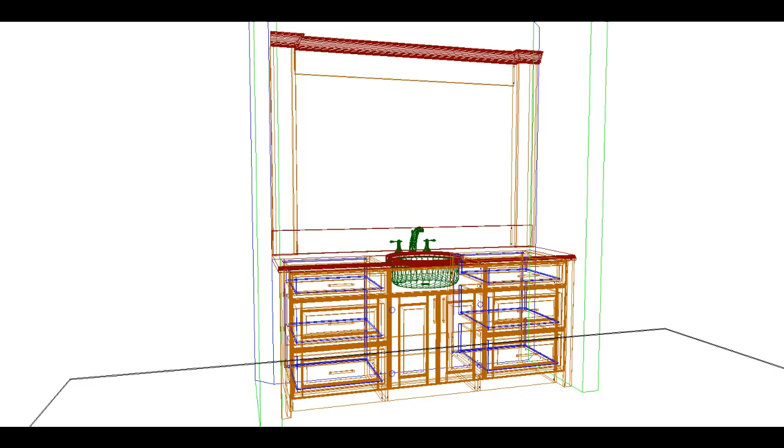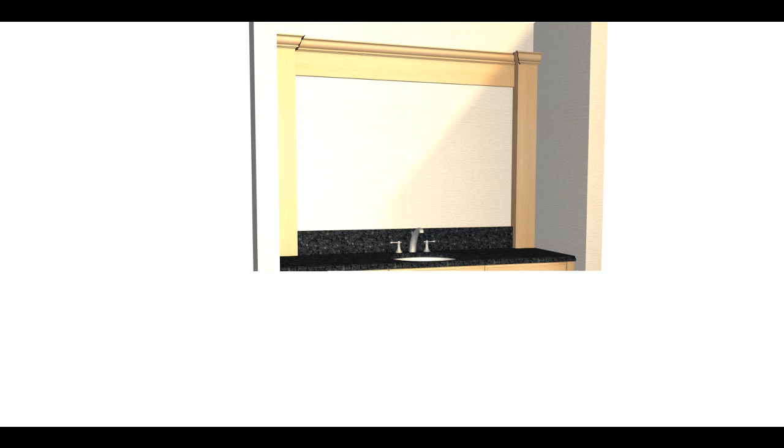I'm going to show you today how to lay out a standard vanity cabinet. Pretty easy. This is not a master vanity by any means, but just a real simple vanity cabinet that you can put into a powder bath or a guest bathroom or something like that. It's pretty simple, and really with cabinets, usually simple is a lot prettier, so let's just stick with something that's easy.

And you can kind of trick this thing out at the end with mirror frames, crown molding, toe skins, and all this other stuff. But this will just get you the basics on how to lay out your vanity cabinet. So I just did a rendering here for you. What we have is a sink cabinet in the middle, 3 drawer stacks on left and right sides, and then we've got the fillers going into the walls.

Now the fillers can be minimized because you can customize our cabinets to 1/16 inch width increments, so we can really make these things minimized. Now you do need a filler. That does pull that cabinet off the wall, and it does help functionality on that cabinet. We'll get into that here in a minute.

So mirror frames up top. I put some crown molding around the top. This is our nice mirror frame we have available in our wall cabinet section of our website. Pretty easy. So let's get started.

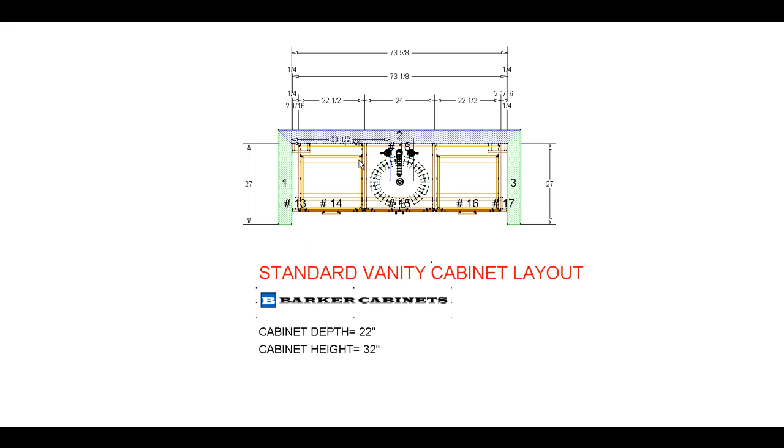Let's go into a top view. Here's a top view of our standard vanity cabinet layout. What I'm going to do is delete these, and we're going to get started from scratch, so you can kind of draw it out at home with a piece of graph paper or really whatever you want. You can just draw it on a napkin if you really want to.

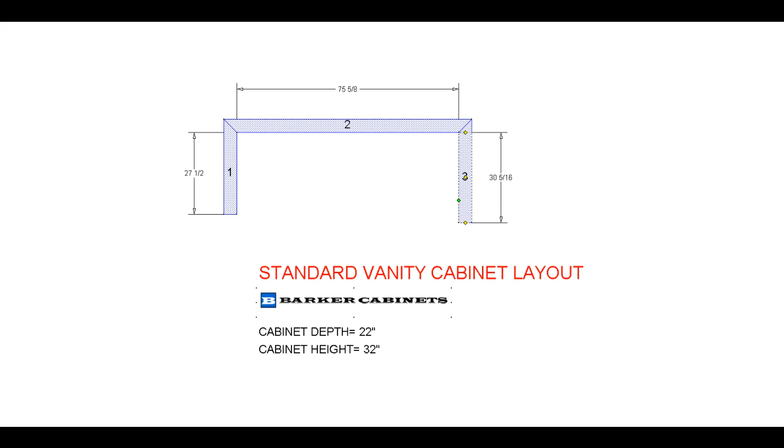So let's start off with just a regular wall. I'm going to make this wall an odd dimension, so let's just make it 75 and 5/8 or something like that. The reason I'm doing that is because I want to show you that it doesn't really matter. Your walls don't have to be a standard depth or length in any manner.

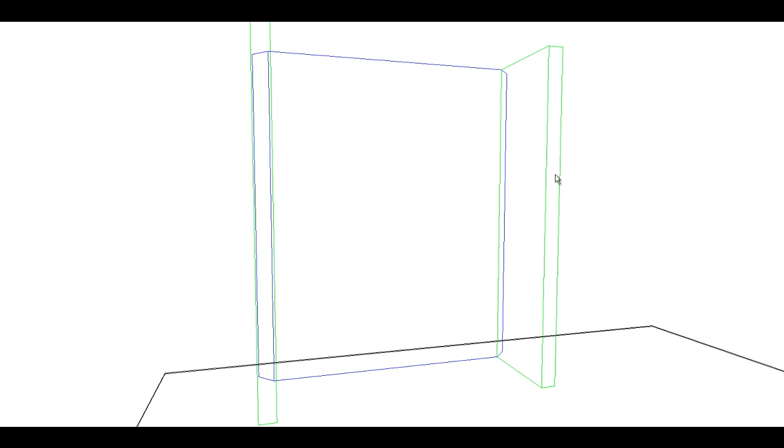So side walls here, I make them 27 inches. Normally your contractor will make these at least 24, 25. And I'm just running a cabinet vanity from wall to wall. So in 3D, real simple, it's just wall to wall. Pretty simple, easy stuff. So let's get started.

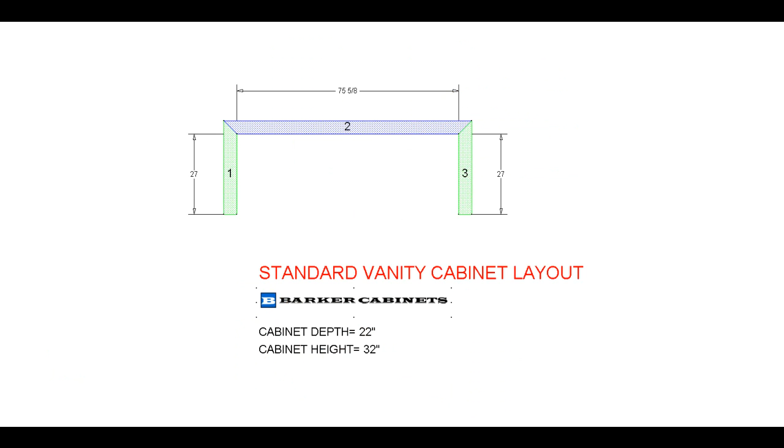We're going to be pulling out a base 2-door cabinet, and you can do either one here. We do have a false front sink cabinet, which is basically where it's just a false front here. With standard vanities, and I know I showed you the one with the false front in the beginning, more typical is going to be one without the false front. A lot of people want to maximize the height of the doors, so let's change it up.

Let's just do one like this, where you have a sink cabinet. It's open at the back, as you see right here. I'll fill that in for you. It's open for plumbing, and that's the next thing we're going to get into.

Alright, so typical widths of sink cabinets in standard vanities: we have 24, 26, and if you really get into a tight spot, you could do a 22. I'd recommend sticking with 24 to 26. That'll make sure that your sinks actually fit inside of the cabinet. So for this one, since we have the room, I'm going to go 24. That's the standard sink cabinet width that I would recommend.

Height, I'm going to say it's going to be 32. Depth is going to be 22, and that's from the front of the cabinet to the back. So standard cabinet depth for vanity cabinets, 22 inches deep. Cabinet height for vanity cabinets, 32 inches tall, and that's from the top of the cabinet to the ground. Pretty simple.

Okay, so let's center this thing on the wall first of all. I'm not real good with math, but let's see here. Yeah, nailed it. So 25 and 13/16, left to right. Basically, I want to equalize this thing out.

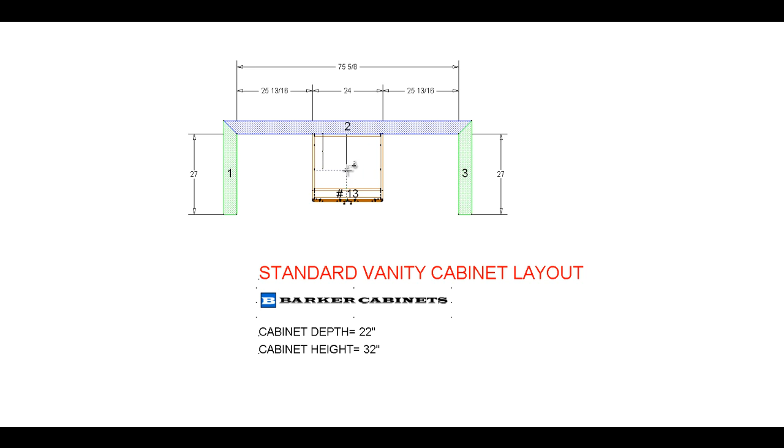Now, you're going to really take a look at your plumbing. Let's just say we have plumbing coming in here, and let's say the plumber wasn't real good at his math, and he put it somewhere here. It's all off center. These two lines represent plumbing.

Now what you want to do is take a dimension from one side of the wall to the beginning of the plumbing, and then one to the end of the plumbing. So in this case, I came up with 29 and 3/8 where the plumbing starts, and 37 and 1/4 where it ends. So we want to make sure that our plumbing actually fits inside our cabinet, into the back here.

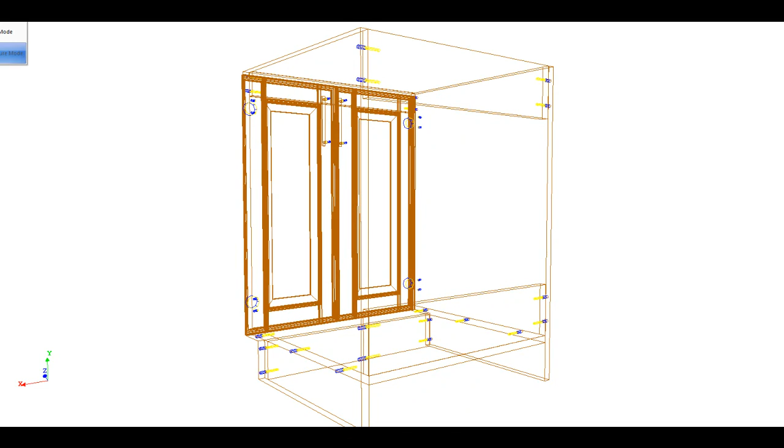Now if it doesn't fit in, you're going to have a bit of an issue. And the reason for that is you don't want to have to eat away at this wall of the cabinet. I mean, that's a pain. This is American hardwood plywood. This stuff's pretty substantial. It's not going to break on you, so it's going to fight you. So just make sure your plumbing's inside of the cabinet. That's pretty much all you really need to worry about.

Okay, let's take a look. Go back to top view. So right here, we know it's going to be inside of the cabinet. We're good to go. Now let's say the plumbing was way over here. You could widen this cabinet up, still keep it on center, and you'd be okay. But you're going to lose a little bit of drawer space.

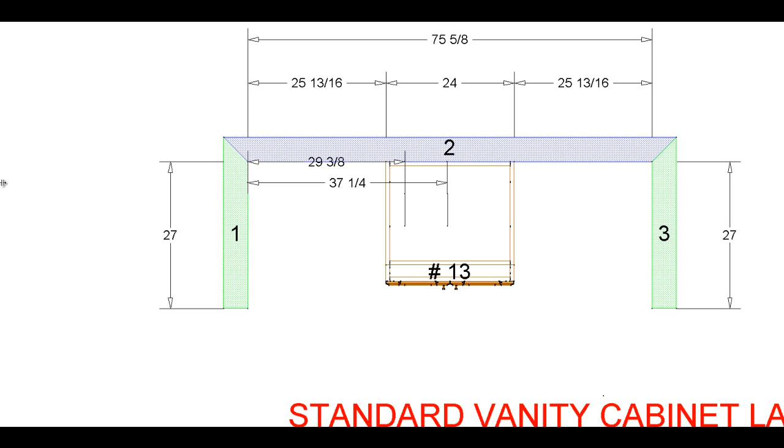So I'm going to throw a 3-drawer stack to the left of my cabinet here. The width, we're going to get into in a minute. Let's just make sure it's off the wall. The depth, I need to change that to 22 inches, and the height is going to be 32 inches, as

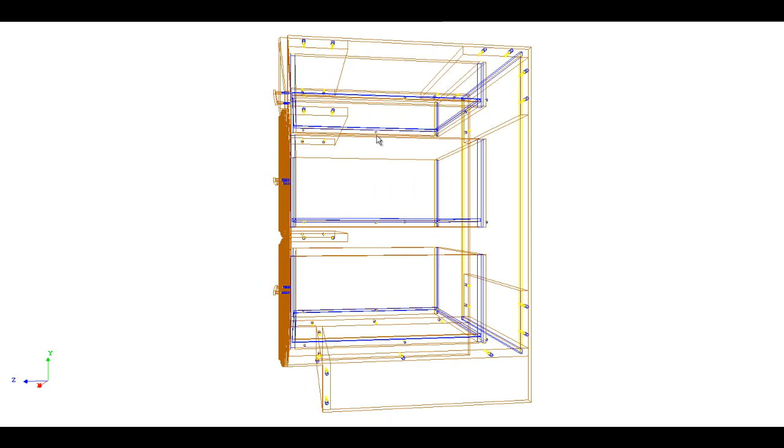we talked about already. Taking a look at the interior of this cabinet, you see here, you got a 3-drawer stack, all maximized out. We're at full overlay cabinets, pretty easy. So you can kind of see a line drawing of our cabinets there. Okay, so let's get into it.

What we're going to look at here is the width. We know that the height and the depth are going to be pretty much the same as our sink cabinet to the right. So I want to get this filler width really dialed in. We know that we're at quarter-inch increments for all of our cabinets. Right now this is 21 inches wide.

We want to make sure we have at least a 2-inch wide filler going into the wall in this case. So I'm going to pull out a filler, throw it on the wall and see what happens. We got a 2-inch wide filler right here, and a 5/16 space to the left of it. I'm going to add another 1/16 of an inch onto it. Our filler should be customizable down to a 1/16 increment.

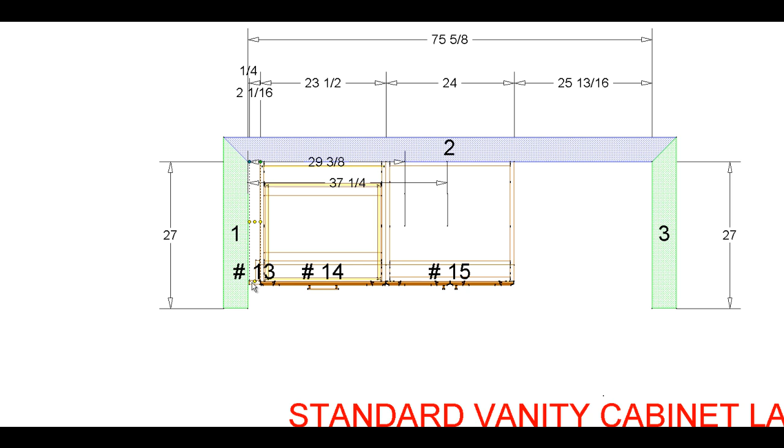So you need at least 2 inches. Obviously, you want to have a little bit of space, and I'll get into why we're going to leave this 1/4 inch here in just a second. The idea is that you're going to have a 2-inch wide filler going right into the wall. Let's zoom in. You can see I left a 1/4 inch space between the edge of the filler and the edge of the wall.

Everybody asks, why leave that space? Well, the widths of our cabinets are dead on, but the people that built your walls were not as exact. If you've ever tried to put anything into your house, you'll notice the walls are almost always out of square. So we leave a 1/4 of an inch because cabinet installation is a lot easier if you have a little room to work with. And I'll show you how we cover that up in a second.

So what we're going to do here is copy this. Go over here, take this filler, and copy that. Okay. I'm having a little bit of problems getting this thing on the wall. It's trying to snap to the other side. So let's just take it over and put it on here.

Alright, so I still have my 1/4 inch space there. I put my drawer stack back. So I know that these cabinets right here, the drawer stacks, are actually going to be identical in width. Now, the filler is the same thing. I got a 2 1/16 there, 2 1/16 over here. I'm going to have a 1/4 of an inch gap between the two.

I'm going to pull this over for aesthetic reasons. Don't need to worry about that. We take care of all that for you.

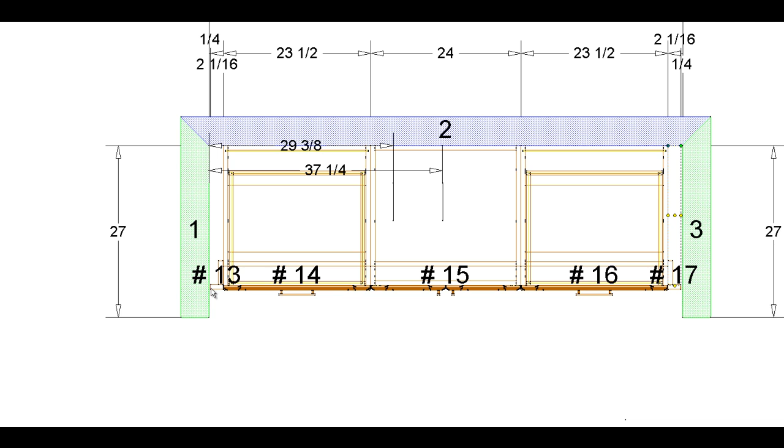Alright, so basically what I have here is a 1/4 inch space on this side from the filler to the wall, 1/4 inch space over here. Now installation, let's say we put all these cabinets on the wall, and we attach the filler to the cabinet before we install it. Now that extra 1/4 of an inch can be covered by scribe molding. Okay. Now let's take a look at some scribe molding.

So screen molding will work. So basically screen molding can be found right here. It's under scribe molding. Sorry. Alright, so scribe molding, basically it's $5 a stick. It's pretty cheap, but the nice thing about it is you can actually scribe your cabinets into the wall without having to sand a filler or an angled filler or something like that. It's a lot easier and it looks a lot more professional. So I'd recommend using a scribe molding.

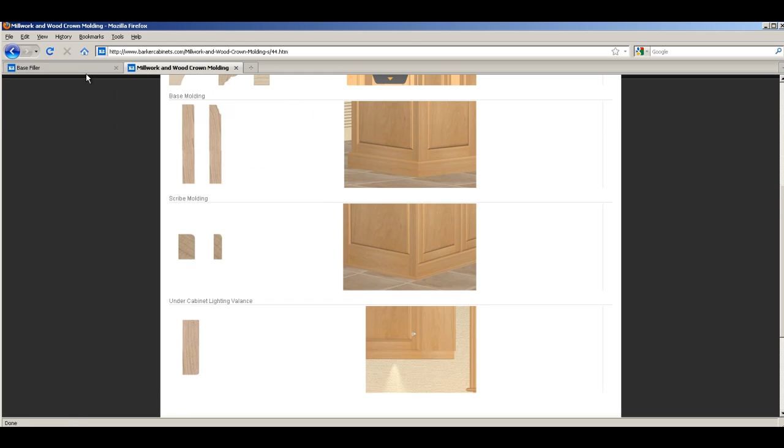Okay, and that can be found on our website under millwork. Just scroll down a little bit, it'll look something like this. It's a real small piece. It's cheap. It's easy to use, and it really does look nice. So, all right, let's go back to our thing. So basically, we're going to use scribe moldings at the walls here.

Let's take a 3D look. So we're pretty dialed in already. Basically, you're going to see 3-drawer stack. Everything's balanced. Everything equals out. All this other stuff, disregard the fact that those are white, please. So, all right. So that's pretty much easy there.

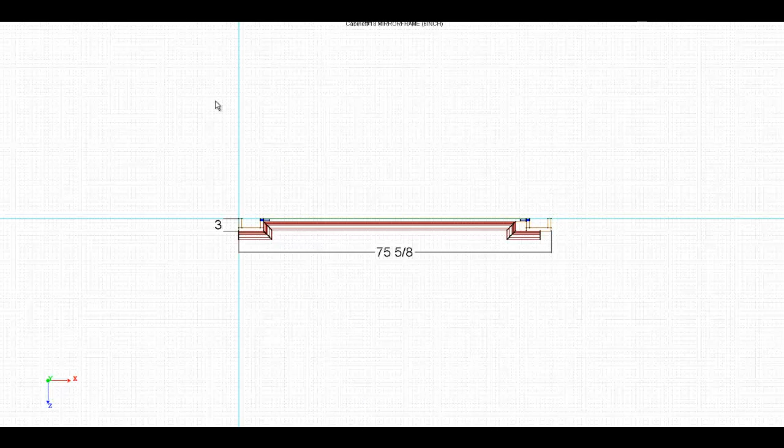Let's take a mirror frame. Okay, I'm going to pull out a mirror frame here, and what we're going to do with a mirror frame is toss it on the wall. Now this is kind of a little overtime deal. So mirror frames are cool because it really does add a lot to the kitchen. Basically, you could add crown molding to the top of the mirror frame. You can basically do whatever you really want to do. And I'm not going to get too much into trimming out the mirror frame, but you can make your own assumptions.

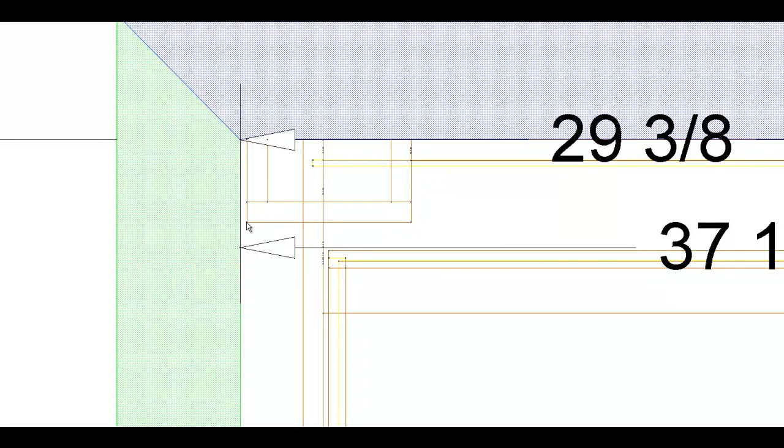So, all right, let's see here. 1/4 inch on each side. We're going to use screen molding again on the side where the mirror frame hits the wall. I still leave 1/4 inch because, again, if that wall is out of square and you try to push that mirror frame up there after it's all assembled, you're going to be eating into the wall or scratching it all up. So you want to make sure you have that extra 1/4 inch on each side.

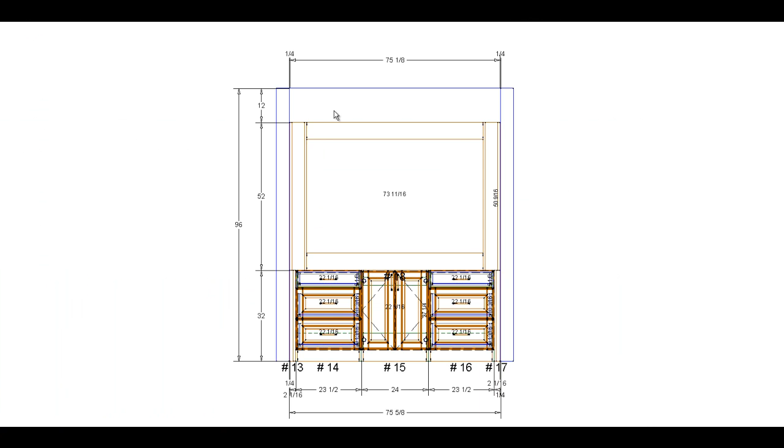Okay, and then you just use your screen molding that we saw earlier. It's a cheap way of putting it in there, and it looks really nice. It's actually kind of like adding more molding to your cabinets, and it all just dials it in. So here's what we have. We have a mirror frame up top. We can put crown molding around that. Crown molding can be found in the millwork section as well. Crown molding is right there. A few different types you can choose from.

And as far as the height of the actual mirror frame, you can go all the way up to the ceiling. Here I have a 96-inch tall wall. Now the ceiling's 96 inches tall. So technically you could take this thing all the way up to the ceiling. I think it looks more proportional if you leave about a 12-inch air soffit above the mirror frame.

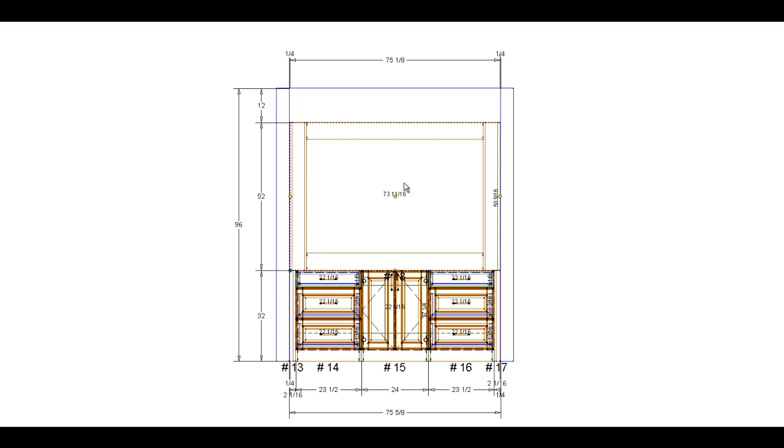And you could always do whatever you want here. I mean, there's no set standards on really what you have to do or what you can't do. But again, I'd probably recommend sticking with some sort of a soffit. You're going to have less problems with installation. So anyway, let's just render this real quick, get a general idea of what's going on.

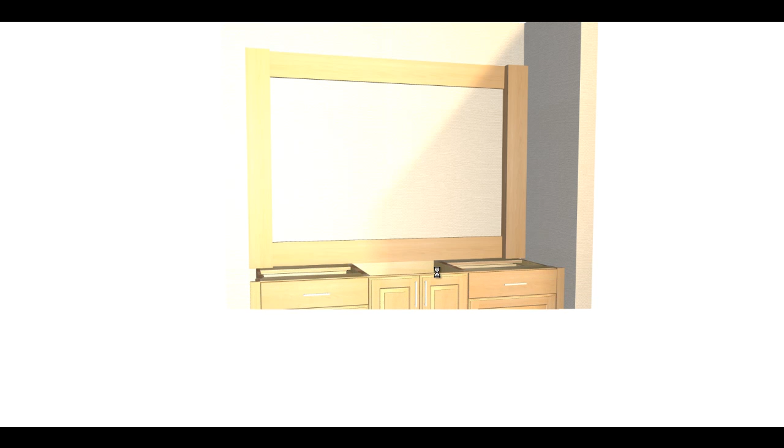You got your mirror frame up there. Obviously, I didn't draw a mirror in for you. You can also put crown molding around the top here. Screen molding is not shown here, but it's pretty easy. You can put that in on site yourself. Sink in the middle. So basically, make sure you review your sink specs, because if you have a real big vanity sink going in there, you might have an issue. So this one's just real simple, like overmount or even undermount sink.

3-drawer base cabinets right here. You can do those, and there's fillers. They're dropping down to the floor. Kind of creates a nice post look. So screen molding again, going down the sides here, and basically that's what we have for our standard vanity cabinet layout.